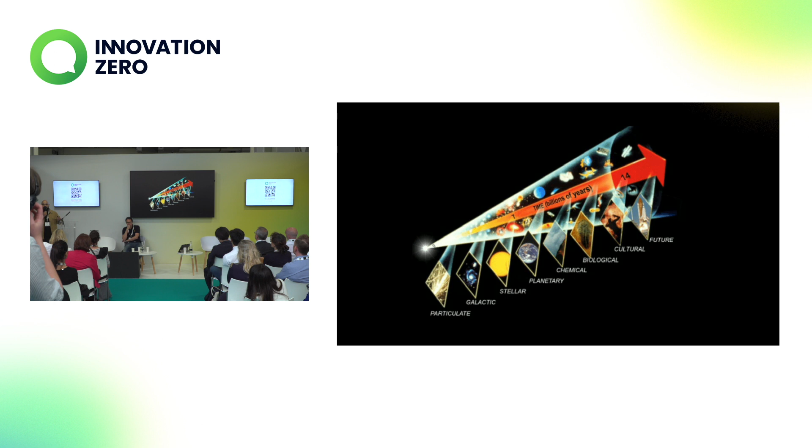They've been extracting energy from their external environment in order to complexify and develop further. Thanks to American astrophysicist Eric J. Chaisson, we can begin to empirically measure the age-old notion of energy being at the source of all material things. That's not just for material things, but also for systems like cultural systems and intangible systems around us.

We can look at how much energy is being passed through a gram of a system within a second. With energy rate densities, we can begin to correlate the level of energy being processed with the complexity of a system. So we can see energy rate densities as the metabolism of systems around us.

I want to remind us of the second law of thermodynamics: when energy changes from one form to another, entropy or disorder always increases. Keep that in the back of our minds, and let's go to the beginning of time, to some of the earliest systems that ever emerged.

Galaxies have an energy rate density of about 0.1. The sun and stars are slightly higher—the sun's at around 2. Then our Earth emerged, and the climasphere, or the exterior of the Earth, sits at around 75 ergs per second per gram.

Biological evolution came along, and we saw a whole new order of magnitude in complexity and energy rate density. Mammals came along at 40,000 ergs per second per gram.

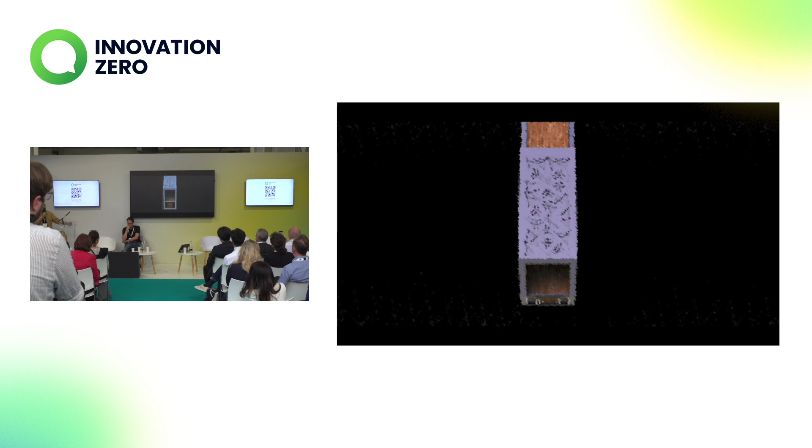This philosophy is manifested throughout all of our core biotechnologies, starting with our materials: mycelium. We work with one of the most wondrous organisms in the world, fungi, and in particular, we work with the root structure of fungi.

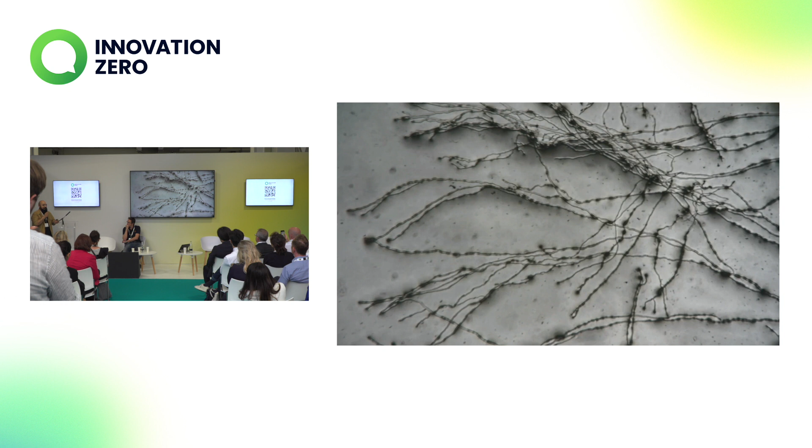We take species or strains from the wild, and then we evolve them on a genetic level in order to achieve properties that are unprecedented for natural materials and construction. We also tweak the environment in which the materials are growing, and then post-process them.

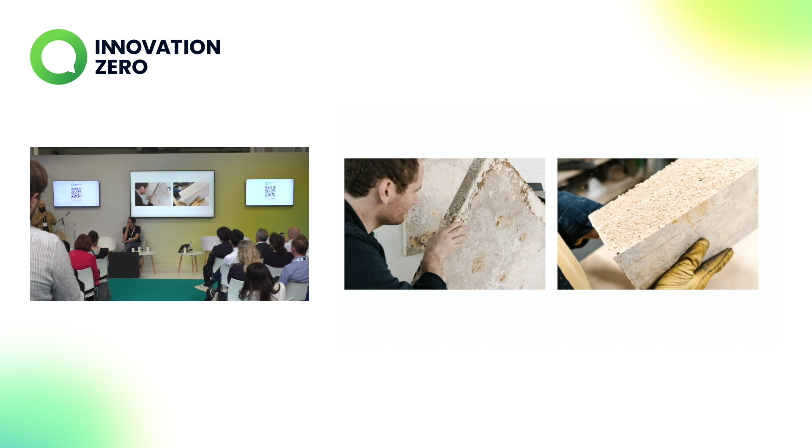This has enabled us to create a mushroom or mycelium-based insulation material for construction, which is currently being scaled with one of the largest construction firms in the world.

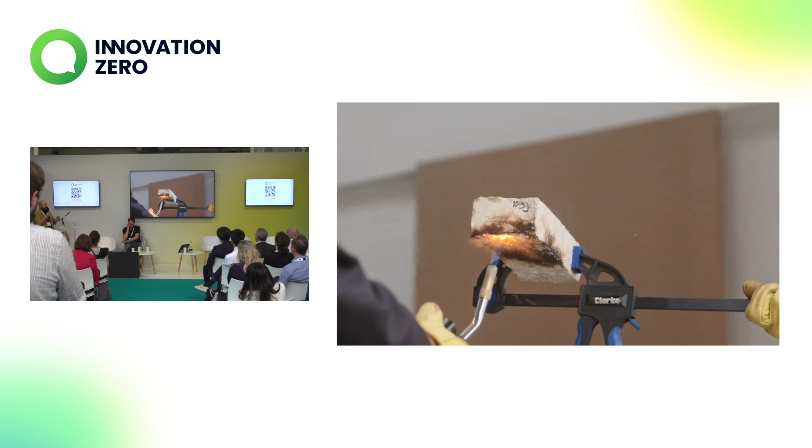As we were evolving our strains on a genetic level, we realized that some of our strains have developed an appetite for plastic. Not only are they outperforming conventional materials established in the industry when it comes to construction standards...

...but they're also able to consume waste streams as they're growing. So we feed our mycelium insulation hemp, and the strains we've discovered can actually consume plastic.

We realized it can consume polyurethane, polyethylene, and polystyrene, as well as polyester, some of the most problematic plastics in the world. These strains are consuming plastic at such a rapid rate that polystyrene was no longer recognizable under chemical analysis after only 28 days of exposure to our strains.

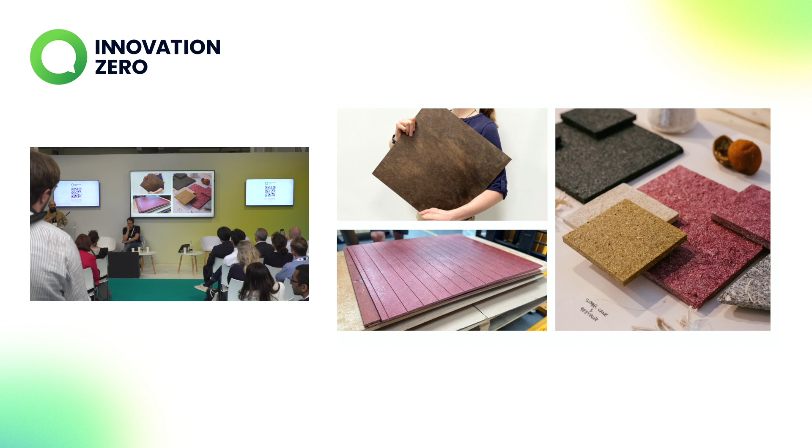We also developed ORB, or organic refuse biocompound, a material that enables you to go anywhere in the world, find an agricultural or food waste stream, and transform it into a high commodity material or product.

Our obscure lampshades are just an example of how orange peel or coffee chaff, major industrial waste streams that are problematic because of their acidity, can be transformed into carbon negative materials.

By just integrating these materials into their properties, property developers are able to decarbonize their builds. Recently, we've made some revelations in the ORB technology where we were actually able to transform orange peel into tiles or a material without any binders. So that's 100% orange peels you're looking at.

Triagomy is another technology we've developed, inspired by the mathematical geometry that lies at the molecular bonds between carbon molecules. It is a construction system that enables buildings to be deconstructed or reconstructed at any stage of their life.

It combines all of our materials, making its environmental impact, when compared to brick and block construction, a reduction in environmental impact of 120%. It reduces build times by 95% and build costs by 70%.

Triagomy enables us to work towards agile infrastructure. Much like in nature, infrastructure responds to the organisms around it and allows us to transform cities in real time.

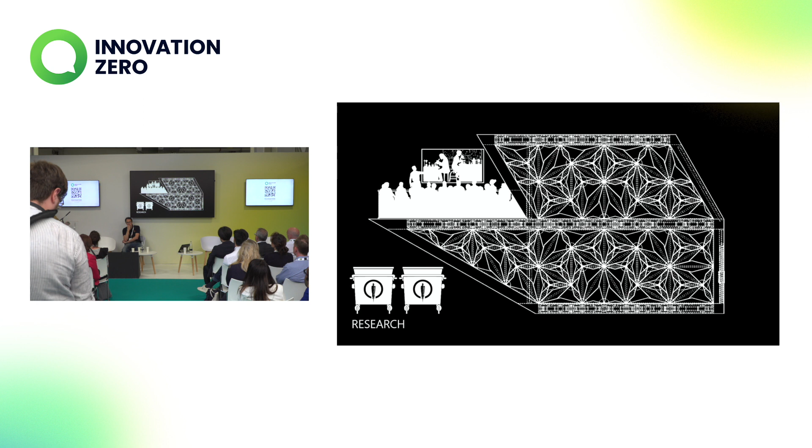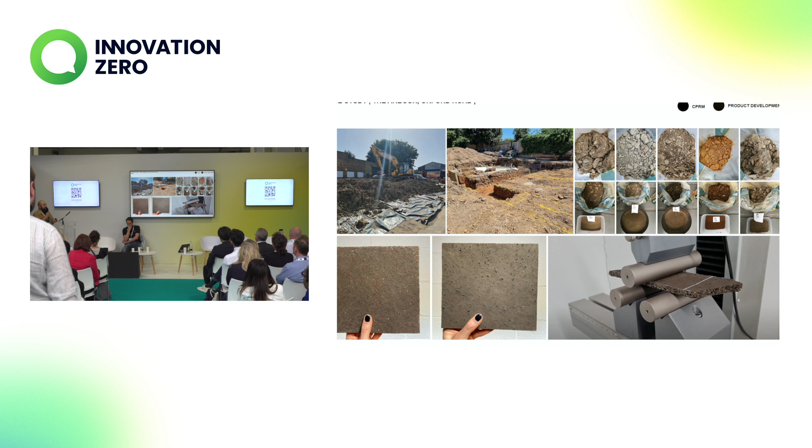We also carry out some transdisciplinary biomimetic research. For example, we transformed soil from a construction site into a material that could then be turned into a product and put right back into that same site, into the buildings on the same site.

We also did the same for Glyndebourne Pavilion. Their waste streams were champagne corks, oyster shells, and grass from their fields, and we were able to transform that into material that could be used for interior facades.

We worked with human hair, one of the most interesting waste streams we've ever worked with. Our scientists weren't very happy working with the human hair from salon waste, but it was a really interesting waste stream.

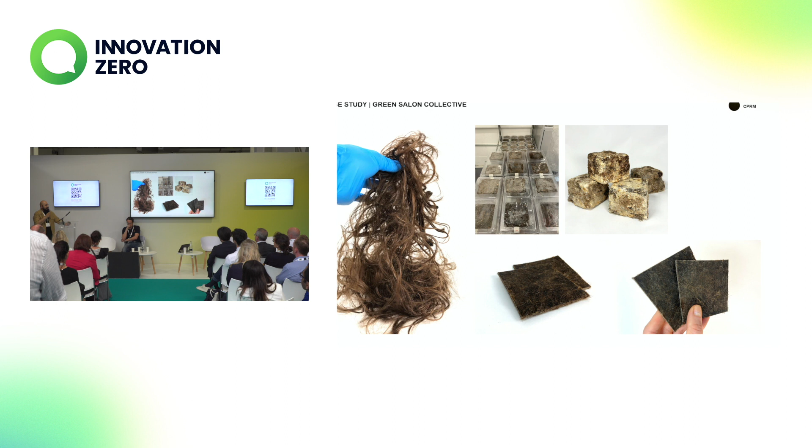You get about 2 tons per month from just 4 salons in London, and we transformed it into a material that was kind of like a carpet.

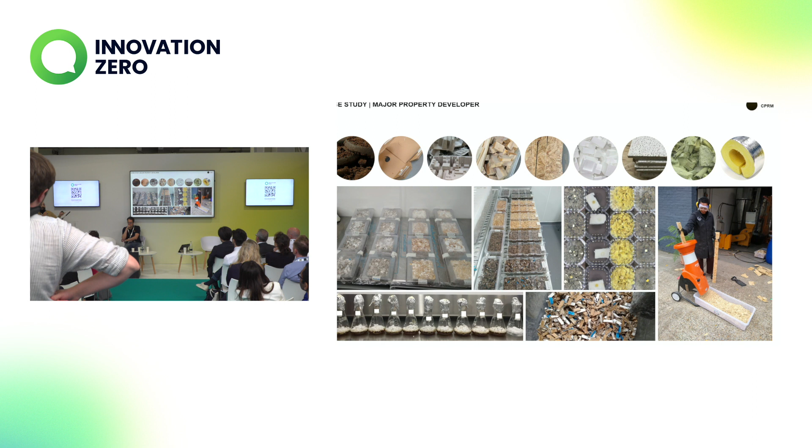We also looked at the most problematic waste streams that come out of a construction site during construction, as well as during the operational phase of a building. Those include things like coffee grounds, cardboard, pulp, packaging, OSB, timber, mineral wool, ceiling tiles, and we were able to match them with each of our biotechnologies in order to create new materials. We transformed the polystyrene using our mycelium strains, and we transformed the wood waste.

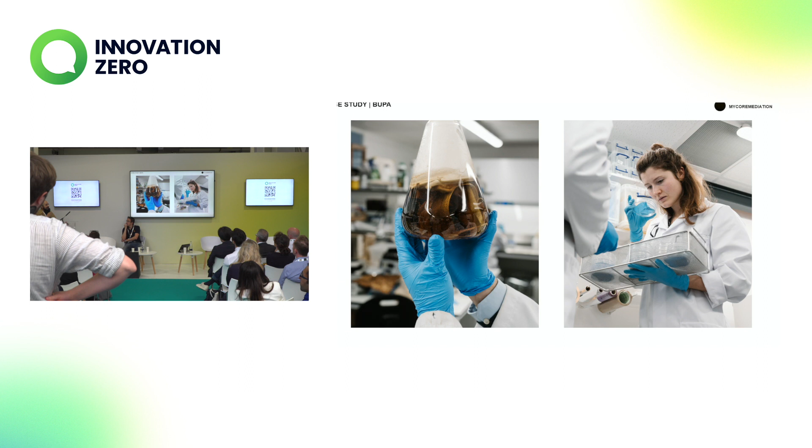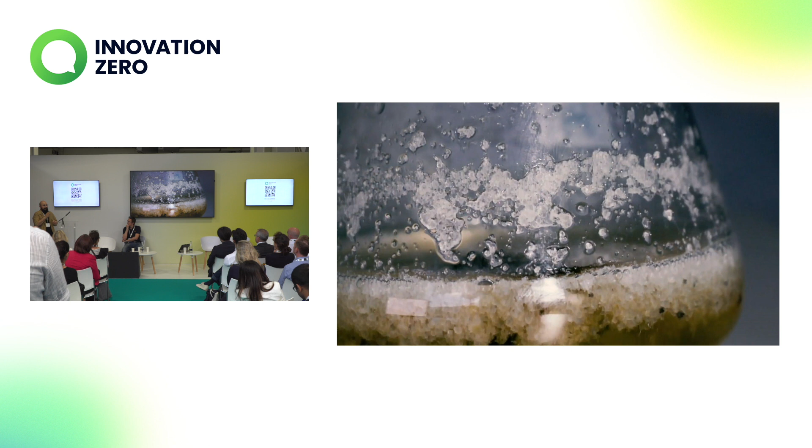and the cardboard and the coffee grounds into materials that could be used in construction. We also worked with Bupa, where we worked on PPE, face masks and gloves, where we could take those waste streams that were being produced at such a high quantity during the pandemic and completely break them down using our mycelium strains. And we're currently working with the Biomimicry Institute to integrate bacteria into our technology to look at a wide range of chemicals and toxins found within the fashion industry in clothing, breaking them down, and then breaking the polyester and cotton mix fabrics down as well.

We've been awarded and recognized by multiple bodies globally and nationally in the UK. And we're working towards a biomimetic future with major multinationals, government, communities, in order to not only see biomimetics present in the legs of a robotic dog that has an ever-increasing capacity for mass destruction, but instead have it be in our mindset, in our thinking, transform the way that we think into one that is holistic and systemic.

And enable biomimicry to be present in our thinking and in all of our technologies. That will hopefully enable us to change the narrative of humanity in the story of evolution from one that is impeding the evolutionary rights of other species on Earth to one that is actually supporting and regenerating the evolution of all organisms around us. And that brings me to the end of my presentation. Thank you all very much.

Okay, I think tech is, we figured you good? Woo, okay, great. Hi, I hate following Ahab. It's absolutely horrible, and I will not be as profound, sadly. But hopefully I can still be interesting.

So my name's Brittany, I'm co-founder and CEO of Qflow. We are the simplest way to decarbonize construction. And we're doing that not just by making them generate less carbon, generate less waste, but also hopefully saving them time and money in the process, because unfortunately we live in a capitalist society, as much as we hate it, and we need to be able to do that too.

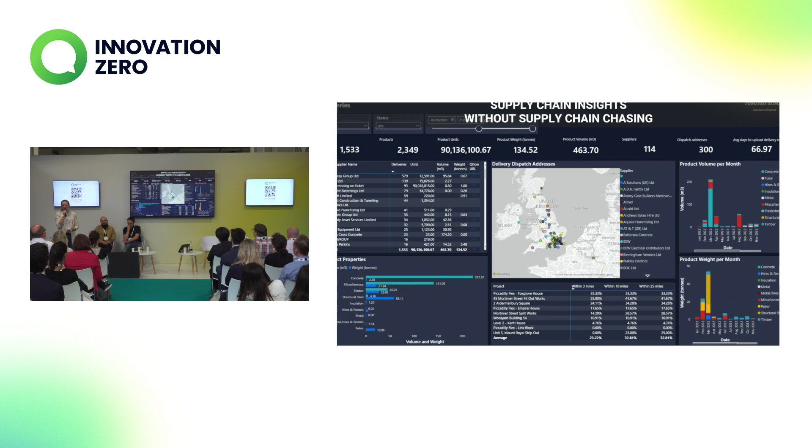What this looks like in reality today for construction projects is knowing exactly what's going on across your supply chain without having to chase them, which is really nice, because no one likes being on the phone to a slightly angry contractor. It also means that you can keep real-time overview of whatever certification you're going for, and I know there are lots of Marmite relationships with things like BREEAM and LEED.

But they're there and they're things that we use to measure progress. They're also helping to understand our impact on the waste side of things.

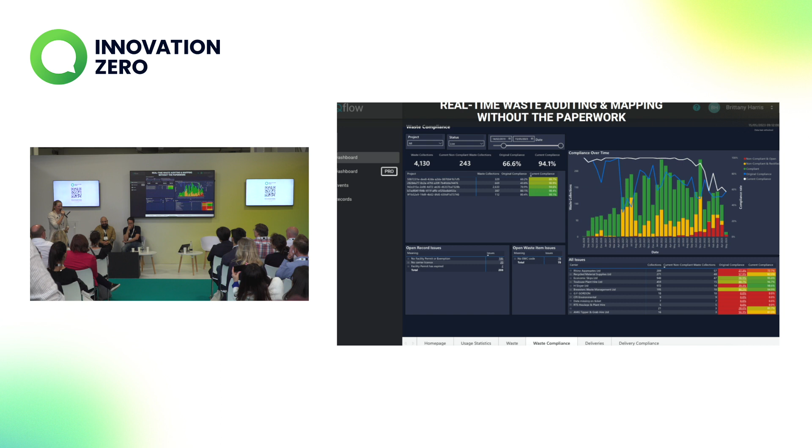And there's a report coming out in a couple of weeks' time that looks specifically at the UK's waste impact from the construction industry and how we can focus our efforts with our supply chain to reduce the impact of our impact on waste, and how we can make sure that ultimately we're not contributing 40% to landfill, and actually that can turn into feedstock for amazing other startups and innovators who are transforming the way that we build.

And finally, and I know obviously we're at a conference all about decarbonisation, but it means that we have a really clear picture, not just of our scope 1 and 2, but also our scope 3 carbon. And for the construction industry, that is 90%.

90% of our carbon is scope 3 across our supply chain. And so if we have any chance of decarbonising what we do, we need to be looking at this piece.

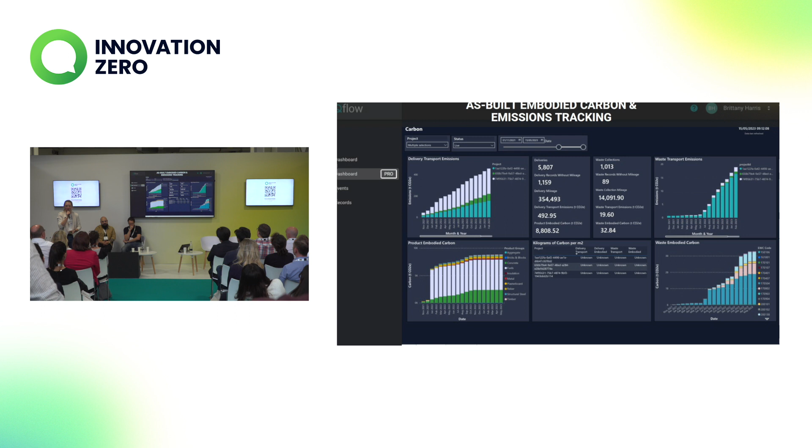So we've been working on sites not far from here, on the other side of London, looking at major commercial developments on how you can improve the responsible sourcing of things like timber, which is a huge, huge material supply for our industry, but also delivering actual cost and time savings, which means that as an industry, it's not only the right thing to do, but it's the right business thing to do to make sure that we're operating more sustainably.

We don't just work with commercial developments, we also work with major infrastructure, and no matter your opinions on HS2, I think ultimately we want it to be more sustainable at the end of it being built, if it gets built. And so we're still working with some of the heavy civil industries as well.

So now we know what went into these developments, whether they're big event spaces like this or major infrastructure projects. We also know what we can take back out.

Not only can we see where we have an impact today and the embodied carbon per square metre of our real estate, we also know what's available for other people in this space who might use them as feedstock for their material supply chains, or where you might be able to send them back to the manufacturer and supplier for re-warranty and remanufacturing so that it can be used at its highest level of value, not just recycled.

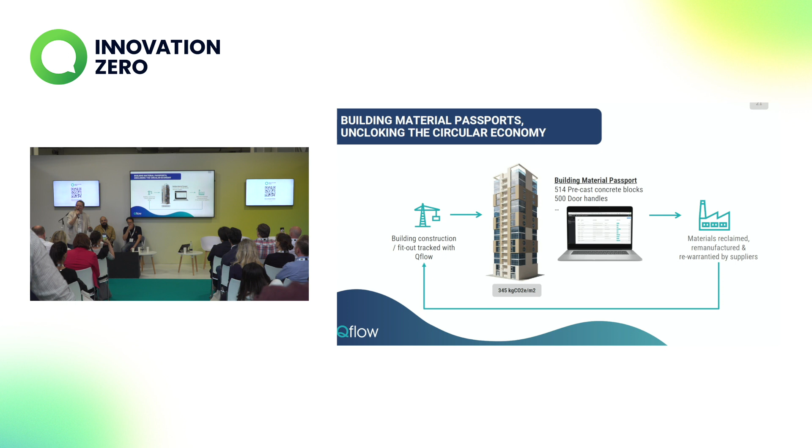Ultimately meaning that we're no longer building from raw materials extracted from the planet, causing environmental degradation and social impacts. We're ultimately building from within our own built environment, drastically reducing our carbon impact and our contribution to waste. This is urban mining for the construction industry, and this is the way that we build a more sustainable future.

So if you want to find out any more, we're just down the corridor, and I will be here afterwards, and I'm more than happy to field any questions if we have time.

Any questions? I think we've got a couple of minutes. Stunned silence. Oh, yeah, sorry. Hi.

So mostly for this, for urban mining, you're talking about the future, about structures in the future that we'll be able to extract from. Do you have any type of system or backtracking system for current buildings, so we can use the materials from them or know where they come from, and what we can do today to use recycled materials instead of raw materials?

I'll use both. Yeah, really good question. So today we're not tracking existing buildings in the way that QFlow works, but there are some amazing companies doing internal scanning. The challenge with that is you're only getting a skin deep picture.

So what QFlow is doing is obviously tracking the materials as they're being stripped out, currently classed as waste, but we're looking at ways to integrate with other systems like GlobeChain and circular marketplaces to put that back into the system where we can.

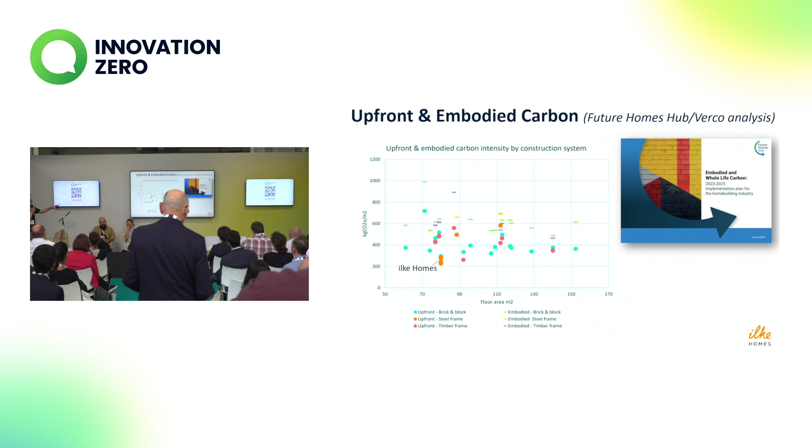Ours are the orange dots. We use a galvanized steel frame, which I think some people would naturally think would be higher embodied carbon than timber frame, and certainly lower carbon than brick and block. But what you actually see is a real mixture, and that's largely because the efficiency of your design has a huge impact on the upfront embodied carbon of your products.

We need to be reducing our emissions in the next 10 to 15 years. That life cycle there is a 60-year cycle, but we need to be reducing emissions in the next 10 to 15 years. So we've done a lot of work on this.

We benchmarked ourselves against a traditional build, which is typically around 25 tons - the top of the chart. Our first design was around 20 tons. We made a further saving of about another 15 to 20% last year with our refresh design in our A1 to A3 upfront carbon. We're now looking at where we can go further. We've identified a route to halving our emissions, and we published that in the Journal of Building Engineering last month. We're now looking at where do we go beyond that.

Some of the solutions there go beyond what we can actually do ourselves as a manufacturer. We're relying on our supply chain decarbonising. When will glass decarbonise? When will steel decarbonise? When will some of these other materials, like plasterboard, decarbonise? Or will alternatives come to the market in order to deliver a zero embodied carbon house? Because it certainly isn't possible today - I think the closest you can get is an igloo when you make it in the winter.

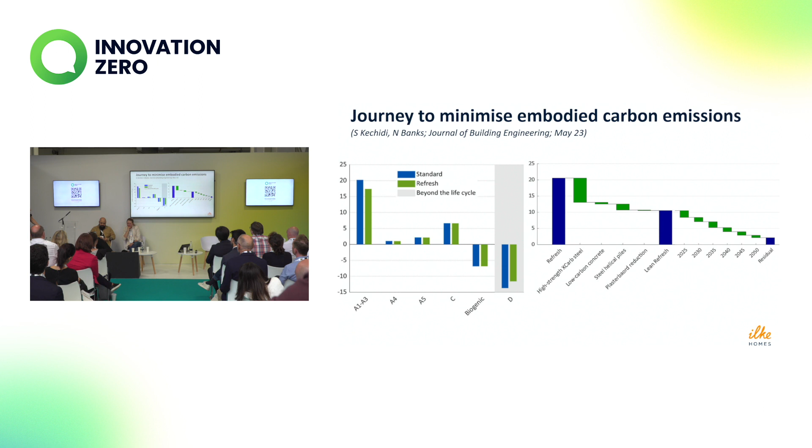So the embodied carbon is a key piece, but also there's a big debate in some of the earlier presentations today around operational carbon versus embodied carbon, and where the right balance is. We think we're striking a good balance, but one of the things we're keen to do is engage our customers in carbon, and generally they're not that engaged - I think the people in the room here probably are, but generally they aren't. So the bit we've been focusing on is energy bills, and we now have the first guaranteed zero energy bill house.

We've partnered with Octopus Energy, and these two homes are now occupied in Stanford le Hope in Essex, and they are receiving a zero energy bill that's guaranteed for at least 5 years, but expected to roll on an ongoing basis. We're monitoring the performance of the homes closely, and they are outperforming the projections, using less than was predicted.

So these homes generate around 20 to 30% more energy than they use on an annual cycle basis, and that enables Octopus to guarantee a zero bill by managing when that energy is imported and exported to the grid. So we have a 10 kilowatt battery and a hot water cylinder to manage the heating and electricity usage in the home. So it can be done, it is being done.

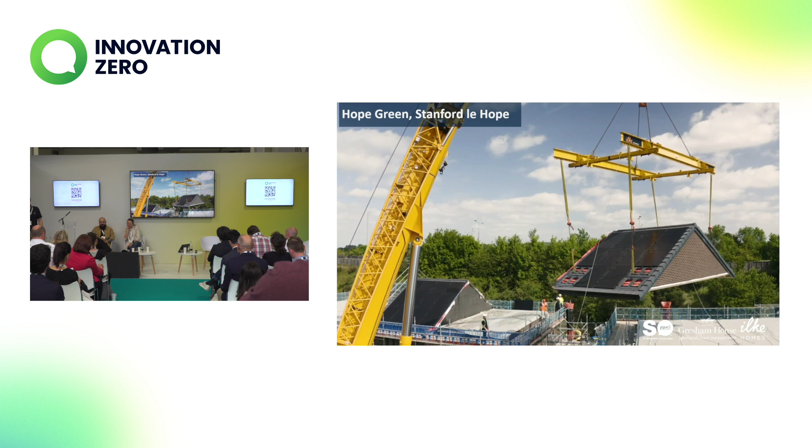Octopus are looking to roll that out with house builders across the country and potentially around the world, because Octopus are running in 8 countries. One of the big things we look to do is we manufacture our housing modules, the occupied spaces, but we're also now manufacturing our roof modules with the solar panels built in the factory with an in-roof system on both sides of the roof, which means we can orientate in any direction on a site and generate a very similar amount of energy.

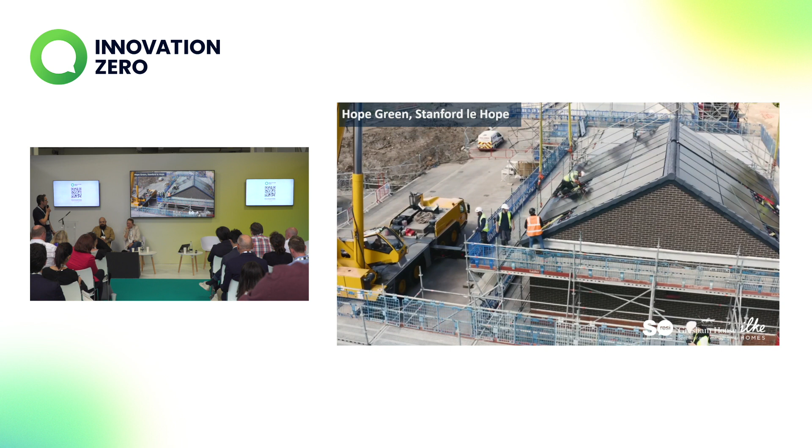But coming back to embodied carbon, one of the key questions is that is adding extra carbon into the construction, adding a battery, adding solar panels. We do lay them in the roof, so we do get rid of the concrete roof tiles, but we are adding carbon. One of the key things there is are we saving enough carbon to offset that additional upfront carbon? And the analysis we've done shows that we are, but we need to be very careful.

As the grid goes to zero carbon and decarbonises over time, the savings reduce, and therefore the products you're buying need to be lower carbon. So as we move forward, the solar panels themselves, the manufacturing process needs to be lower carbon, the shipping of them to here, etc., needs to decarbonise.

Where we are today, we see that payback period being within the first 3 or 4 years, and then overall savings on an ongoing basis. We'll need to keep an eye on that over time going forward, but that is for the solar PV and battery system that's applied to a home.

It is essentially up to 4 tons of extra carbon up front. But it is paying back and saving about a ton of carbon a year at the moment, but that will change over time. One of the things we have also got to look at is we are fitting solar panels in our homes. If we're not fitting them in our homes, where else are we going to fit them?

The UK needs to move from about 10 gigawatts of solar to about 50 gigawatts of solar. Our view is it's better to fit that on the roof of a house than on a steel or aluminium frame in a field. And we've got lots of houses that we need to build and retrofit, and therefore it makes sense to do that in the home.